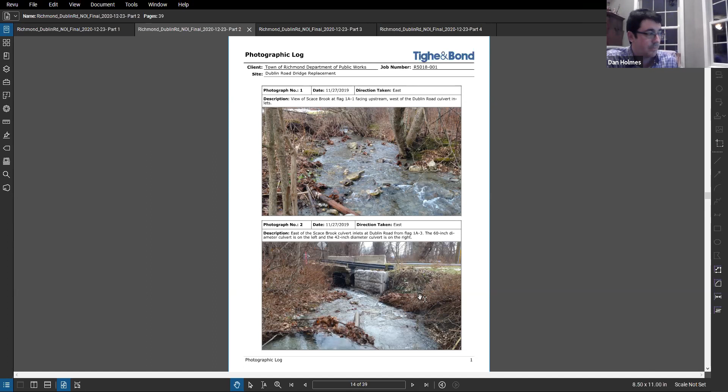So this photo here, if you can see that, that is looking upstream. It's actually located off the road, maybe 100 feet, looking westerly to southwesterly. This is looking at the upstream side or the inlet of the existing culverts. As you can see, there's a little bit of erosion on this side, on the right side, because these are undersized and it's eroded the bank over here.

There's been some temporary barriers to protect some settling that's occurred, and also some temporary concrete blocks as a temporary head wall. There's a little closer look. The flow is going through the northerly pipe, and then under larger rain events, it will overflow into the second pipe. There's a corrugated metal pipe, and the majority of the bottom of that pipe has corroded and is no longer there.

This is what we call boilerplate pipe or steel circular pipe. Here's the original head wall. It looks like a CMU block that's been slowly collapsing and failing, which is the reason this concrete temporary head wall is in place. Down in this lower photo, you can see where the road base and some gravel materials have been washing into the stream.

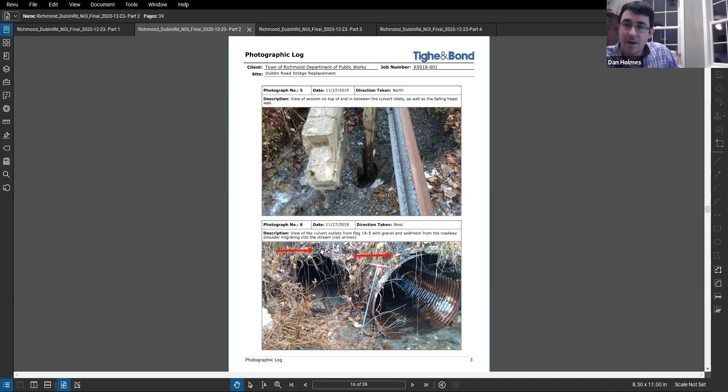These are just more photos of that settlement. You can see right down, that's holding up the guardrail post. Here's the outlet side, the downstream side of the culvert. Again, you can tell the pipe doesn't flow where you can see the active water moving here. More materials that have been washing away into the stream.

Did that catch up? You see this next photo with the arrows? Okay, this is the downstream side. These arrows are pointing to a similar CMU block head wall that has completely failed and is actually in the stream.

This flag right here is the beginning of the wetlands, the BVW. It runs parallel to the road and away from the road. Similarly, this pink flag is bank line. And this photo at the bottom is standing approximately in the same location, just looking downstream.

All right, so this is road surface. There's Dublin Road looking north. This is the inlet side on the left of the photo. This is the downstream side. Actually here, this is on the side, this is downstream, and this is upstream.

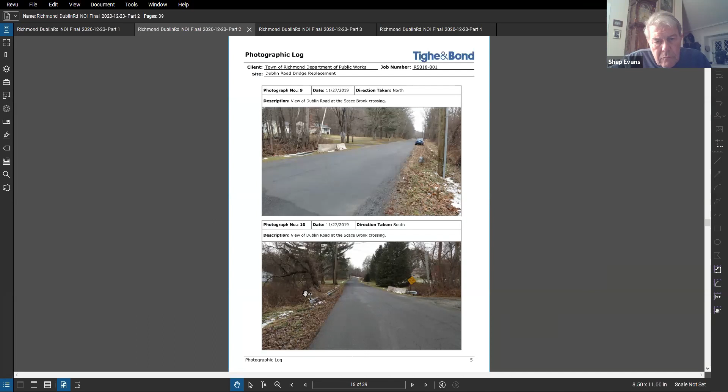All right, that's about the limits of the photo. I'll get to the drawings next, but before I do, this area, roughly here in this bottom photo, is where we're calling for a temporary staging area and a dewatering location. So during construction, as the contractor encounters groundwater only, they will have to dewater to this upstream side and treat the water before it gets put back into the stream.

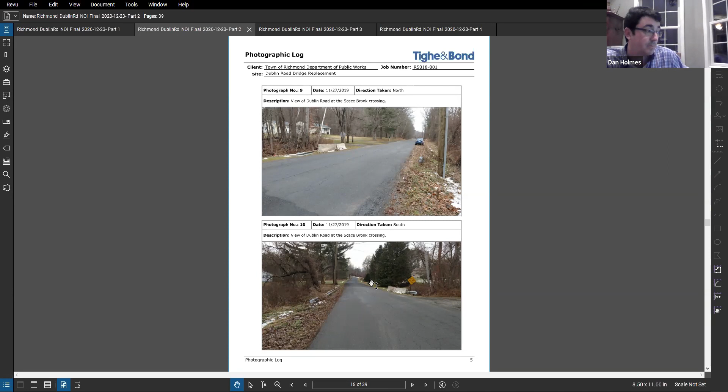We also call for another potential laydown area across the little bridge on the opposite side of the road. I will try to get up to the drawings here.

That's the existing drawing there. So here's the existing drawing, and we're also showing our demolition aspects. I can zoom in a little here.

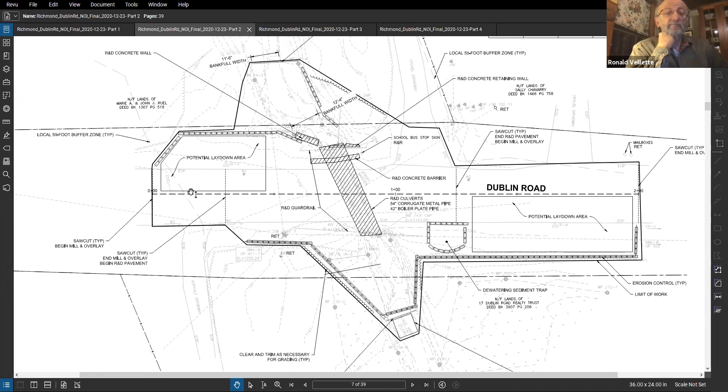So right here is the edge of the road here and here. So the potential laydown areas that I just discussed, we have the dewatering and sediment trap here. The plan is to demolish the existing pipes, culverts, remove the concrete barrier, and also demolish all the concrete head wall. That will be the first stage of construction.

And then this, a little more detailed here with a lot of lines, I apologize, but this is our proposed project and the proposed conditions. So this will be a 16-foot wide aluminum arch culvert with a natural stream bottom. The culvert has been designed to meet the stream crossing standards, which provides greater than 1.2 bank full width.

When the contractor sets up the work, they'll need to install a cofferdam on the upstream side and a cofferdam on the downstream side. If you look into the details, which we can get to later, we don't dictate to the contractor how they have to bypass the stream. They could use flume pipe or gravity pipe and either sandbag or somehow stop the water flow here and let a pipe run by gravity and discharge on the south side where there'll be another cofferdam, or they could set up a pumping system and pump it around.

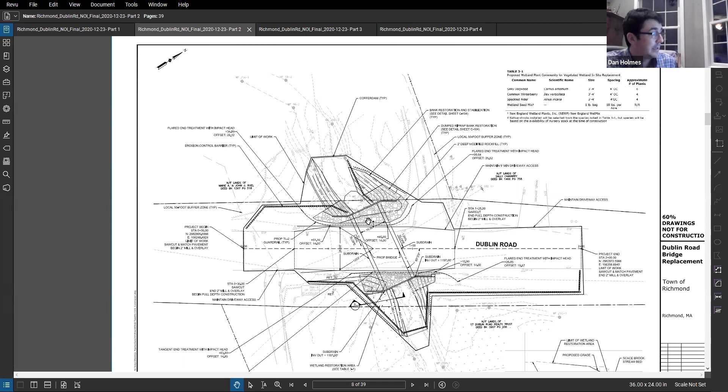There's very little roadway improvement other than a new pavement cross section. Along the upstream side, there isn't any wetlands on this side. It is a bank that we've identified out there. We're just looking to do some regrading of these two banks.

We'll use coir logs and live stakings planted along both sides. Again, we're looking to use a natural stream bottom, so we'll actually save some of the native stream bed material that is removed during excavation and replace it. We will place that on top of a rip rap, which will help protect the structure in the future from any additional scour.

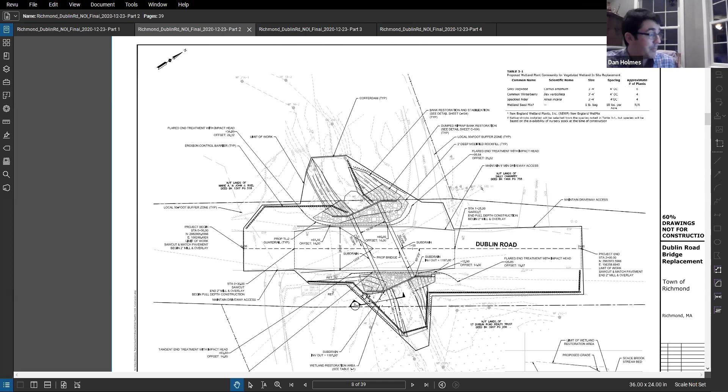On this downstream side, we are impacting some of the wetlands. We are in a wetland restoration area. You can see a little cross section down here, not much of a change from existing conditions. We're calling for 6 silky dogwoods, 4 common winterberry, and 4 speckled alder as the replication, and the rest of the surface will be covered with wetland seed mix.

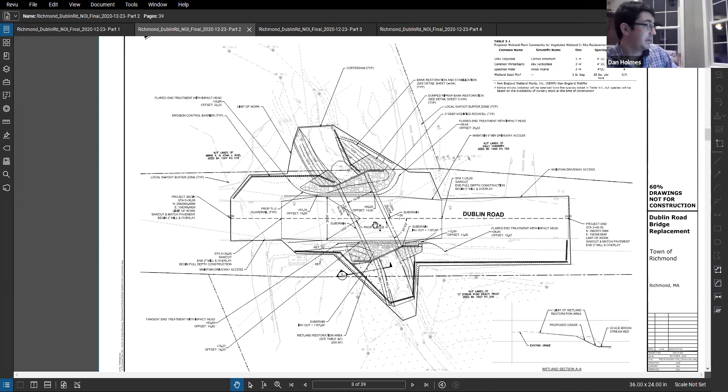That is about it. These are just the details for some of the restoration. We're calling for compost filter tubes for erosion control. There's some of the stream bypass, the dewatering sediment traps shown here.

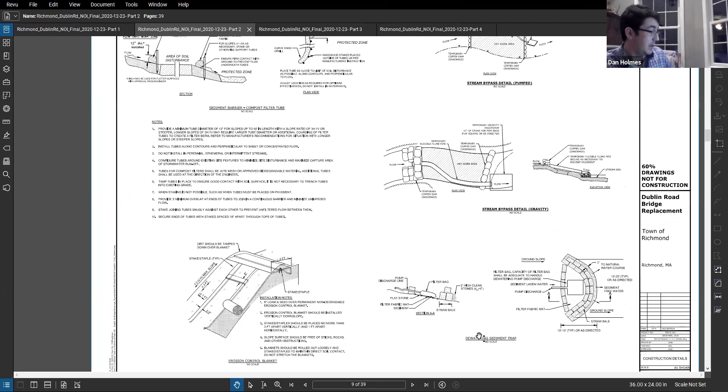There's a roadway cross section, fairly straightforward. Slope restoration, where the restoration is going to be planted loam and seed, but then there's also an area that is going to be dumped riprap right on the upstream and downstream side to protect the structure from any scour.

And I should have mentioned this in the very beginning. During construction, we are planning to set up a roadway detour for the entire length of the project so that the contractors can get in there and get out of there as quickly as possible.

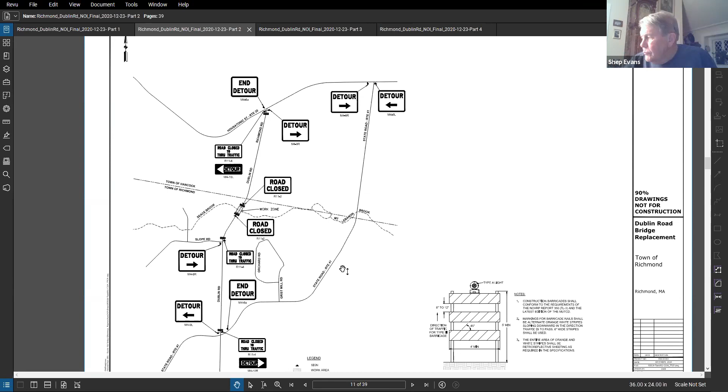What's your time estimate for this project? From road crew, we would like to go out to bid this winter so the contractors can place their bid, allow the town time to select a contractor, and then move towards construction, hopefully beginning the summer before the winter.

Okay, Peter, do you have anything to add? You're part of the application team here.

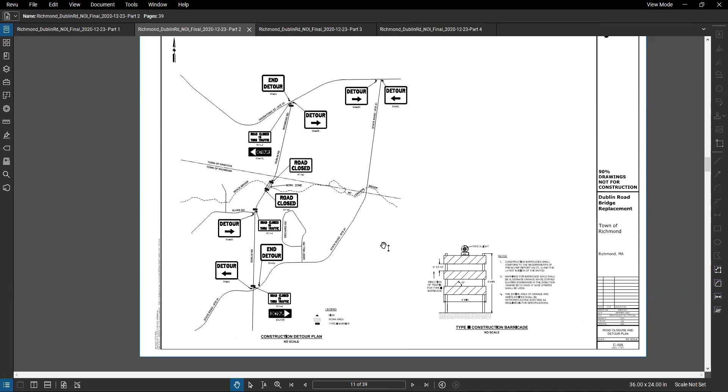Can you hear me? Yes, I can. Nope, I have nothing to add. Dan summed it up pretty well.

Good. For the rest of the commission, if you haven't had a chance to look at the NOI, it is pretty complete. All the hydrological studies and stream studies have lots of detail. Not too many of us are qualified to go through that, but I think Peter probably looked at it a little bit, and it's complete. So if you're interested in looking at that, that's fine, but I have no questions on those studies.

The other thing I have for you, Dan, is the DEP letter that came out with some questions or issues that need to be noted. Do you have that in front of you, Dan and Mary? I do, yep. About going through them one at a time. Okay, they're probably addressed in your NOI. If they are, point to where they were addressed.

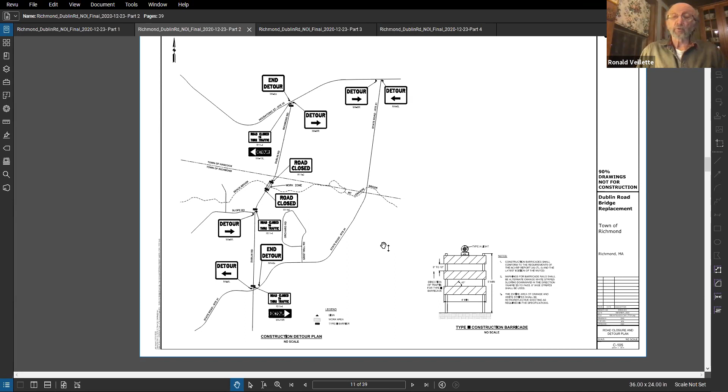So number one, the DEP identified this stream as a cold water fishery, so they want to try and protect that. In our detail, we are planning to put coir logs down by the edge of the banks, with live stakings, with the intent that as those grow, they start providing some shade for the stream to remain a cold water fishery.

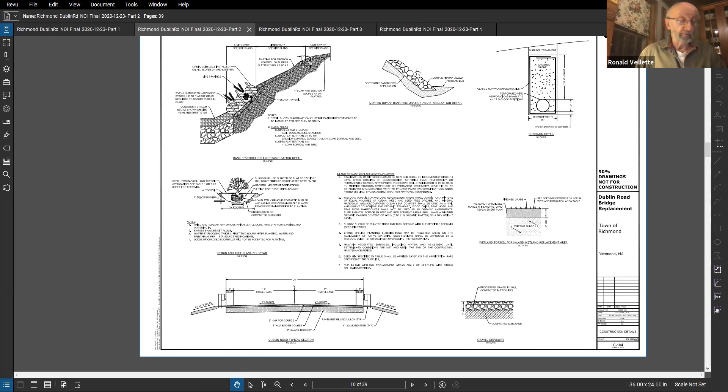Number 2, the crossing's been surveyed under the stream continuity project. I don't have much to respond to that. Sounds like they're all just informational, the information is in the NOI or on the drawings. Right, I think they're making you aware of that.

Guidance on dewatering will be provided in a file number notification email. Again, our dewatering, we do expect, being next to the stream, that the contractor will have to dewater some of it. We have done soil borings out here, and we expect to encounter some ledge and large boulders, so maybe the dewatering is not as difficult if we're on top of ledge, with a little bit less water to deal with.

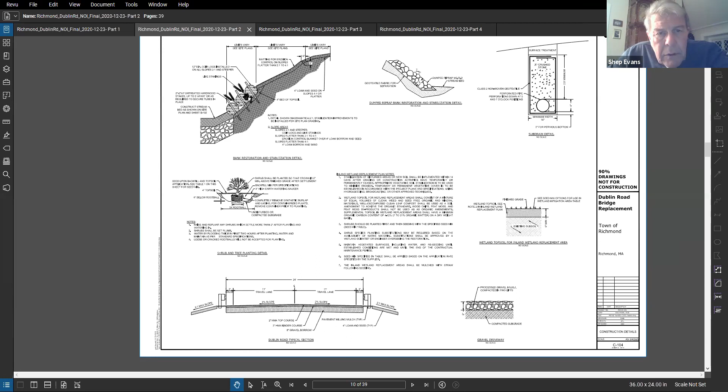Number 4, stream stats calculate a bank full width of 13.9 feet versus the field measured 13.2. What I'd comment on that is stream stats is a very useful tool. We use it all the time, and it gives really good estimations of what will be encountered. I think this actually kind of proves it out through equations and the topography of the site and stuff. You can actually determine on their website approximate bank full width measurements. We're at 13.9, we had an average of 13.2. That again is noted all in the NOI, how we got the average.

So I guess the stream stats was very close to the estimation, very close to actual measurements. We are providing more than 1.2 times bank full and meeting that requirement.

The commission should review the extensive use of riprap that's proposed. We are proposing the inlet and outlet around the head walls and wing walls.

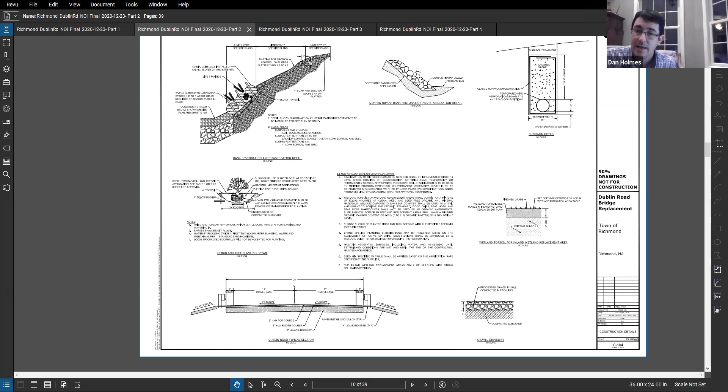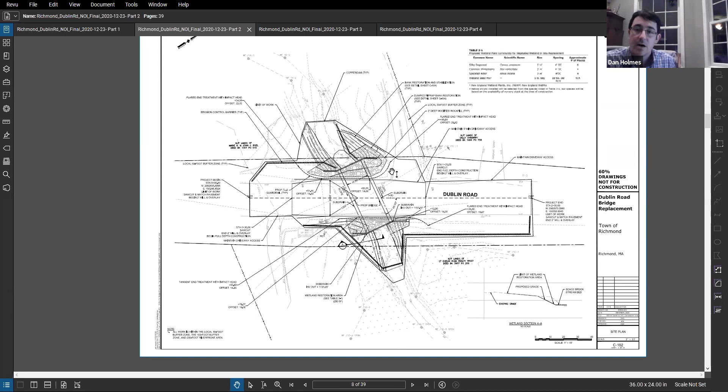And why it maybe looks like we're using an extensive amount is we're also calling for smaller diameter riprap to be placed on top of the head wall, just as protection. Right here is a proposed guardrail, so this project will have new guardrails. Underneath the rails, we typically put asphalt milling to minimize growth of grass or weeds. So on the drawings, we try to do that offset of the milling, and then we're just going to put a little bit of smaller diameter rip, 4 to 8 inches.

And then on the stream side, we have a line right up there and here where we are proposing some larger diameter riprap, upwards of 18-inch stone, to protect just this head wall and wing wall area.

And then actually on the downstream side, we're doing the wetland replication area, so there's no riprap proposed there. There is, similar to the other side, some smaller diameter riprap just behind the guardrail to the head wall. So for a maintenance purpose, it kind of makes sense—we didn't want to put grass, loam, and seed right here that would have to be maintained over time. And then we do have a small piece of slope protection riprap on this side, which is not within the wetlands.

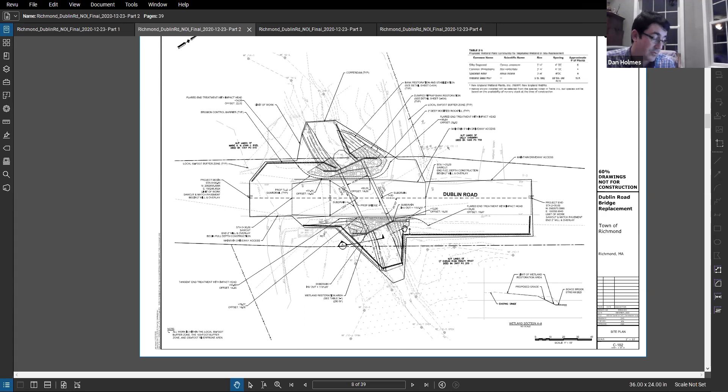And then I guess number 6: in order to provide appropriate water depth and velocity at a variety of flows, especially low flows, it's necessary to reconstruct the stream bed within the structure, which we're proposing to do. It's important that the continuous thalweg, the deepest portion of the channel, be maintained through the structure. When constructing the stream bed, special attention should be paid to the sizing and arrangement of materials within the structure. To prevent failure, all constructed banks should have a height to width ratio no greater than 1 to 1.5. It should be tied into the up and downstream banks and configured to be stable during a 100-year event. The bank should be designed and constructed so as not to hinder riverine wildlife use of the stream bed and banks for passage. All right, sorry, that was a lot.

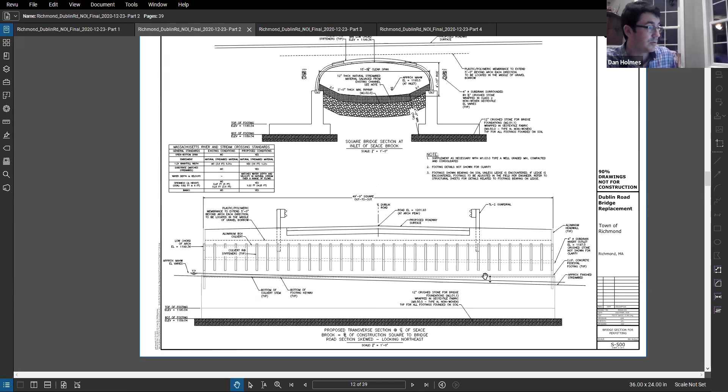I guess what I'd say there is, on our proposed design—I'll give this a second. Did this new drawing come up? This is like a cross section of the structure. You can see we have a 2-to-1 slope, so they were pointing out 1 to 1.5 slope should be the max. We actually call it 2-to-1, they call it 1 to 1.5—we just reference it differently. We are proposing a flatter slope than what they're saying the maximum slope should be.

Yeah, I noticed that. So those are the steeper slopes, which are intended to tie into the banks once you come outside the culvert. And then we have a parabolic bottom to the stream bed. There will be that low spot, going back to the thalweg—you'll have that low spot as the stream starts running through here. It will create a deeper thalweg that meets the upstream and downstream side. And with the 1.2 bank full, there'll be some upland area under normal flow conditions that will allow wildlife to pass through there, in addition to fish.

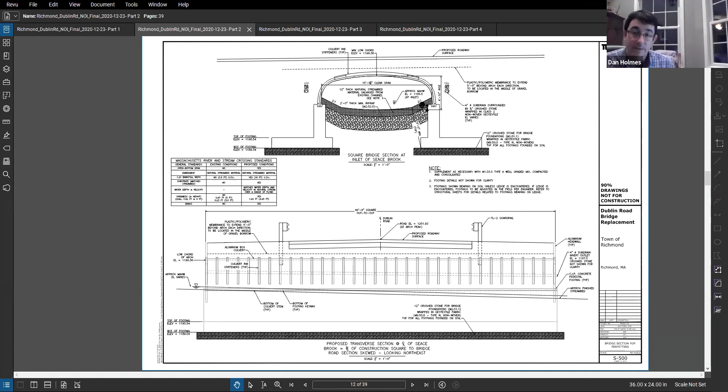How about a short dissertation on the replantings relative to the shrubbery? You're taking out a lot of—you're going to be taking out all the invasives in the work area, I understand, as part of your NOI. Yep, that is true. You're going to be replanting some native species in the areas to replace what was there.

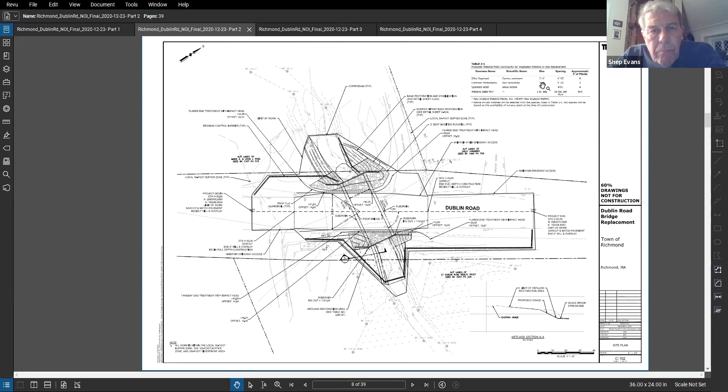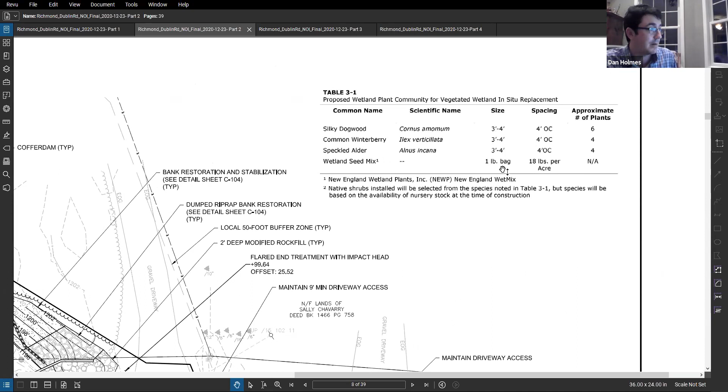So our replacement plan—is that visible? Yes, yes. All right, so we're calling for 14 different plants. They'll be spaced 4 feet apart. Their size will be 3 to 4 feet tall when they're installed. Now that is specific to this restoration area.

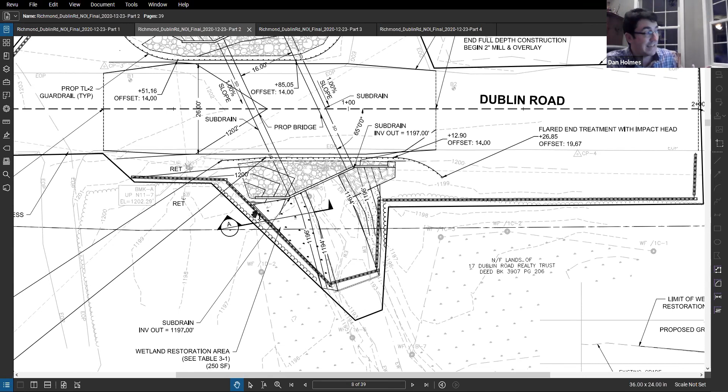And going back to some of those invasives, this area has a lot of those invasives. So anywhere within this project limit that we're clearing or identifying will be cleared out and removed. Unfortunately, there's significantly more down in this area, but that's outside the scope of this project.

That's too bad. And then along the stream edges, both upstream and downstream, we are proposing coir logs and live stakings. So you will get some plant growth, and the roots will help grow into the banks and help stabilize them as well. That will be both upstream and downstream.

As far as other surface repairs over here, it's kind of hard to see, but there are contours here showing where this washout is. That is all going to be fixed and repaired. And then this is all kind of a grassed area, so that will be restored with loam and seed.

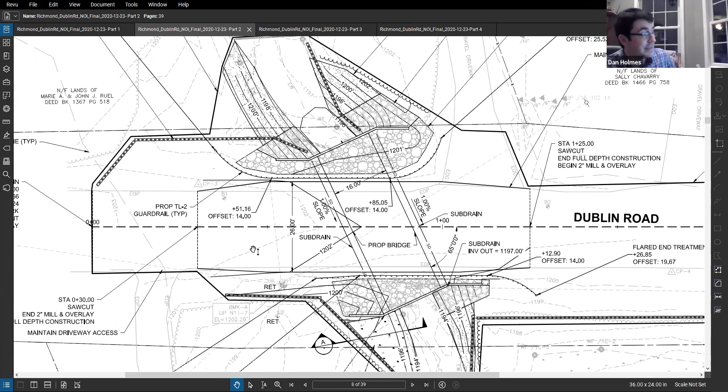You point out the erosion controls. So upstream have erosion controls outlined here and down here by the waterway. On the demo plan, we showed this area as a potential laydown site, so we wanted to make sure that was outlined with erosion controls too. On the downstream side, we have erosion controls, basically following your grading limits, that proposed line. So we're going to run a parallel erosion control along that line, catching and running off here, outlining the work area.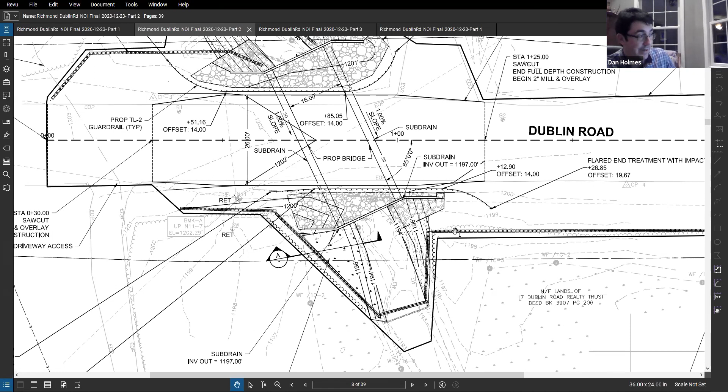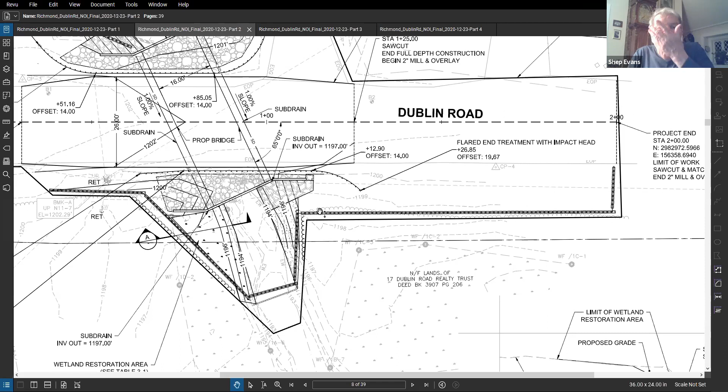Sorry, trying to zoom here. That bubbled line there, that's the existing tree line. So on the north side of the project, we're planning to connect it to the edge of the road, run it down to the tree line, along that tree line, and then back to tie in where that project limit is, where the grading limits are.

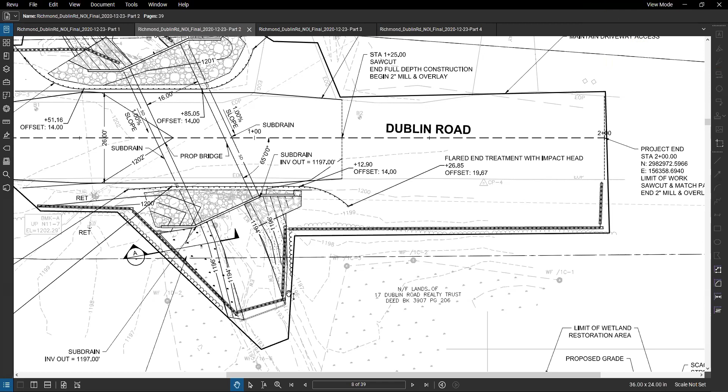Okay. Peter, you have any comments on this? Are you happy with the erosion controls and all that good stuff? I assume you are, because you were part of the process here for them designing this. I'm fine with it. I didn't hear you. Yeah, I'm fine with it. Okay, good, thank you.

Shep, I'm gonna ask - any comments from Natural Heritage? This natural heritage is supposedly not applicable to this one. Is that correct, Dan? I would actually want to loop Mary into this a little bit, if you recall. Yep.

We just received approval from Mass Historical Commission. They want to save the old culvert? Luckily, no. It's the 19th Century Industrial Museum that wants them. And then we could save them and have the contractor deliver it if they do. But I mean, is this estimated habitat, any of it? I don't believe so, no. I don't think. No, okay, it was stated that way in the NOI, so I didn't even ask that question. It wasn't applicable.

So I would want to point out to the commission, this is a perennial stream. It's under the riverfront protection. It's being treated as a limited project because of the nature of the project, and they've minimized the impacts to the area.

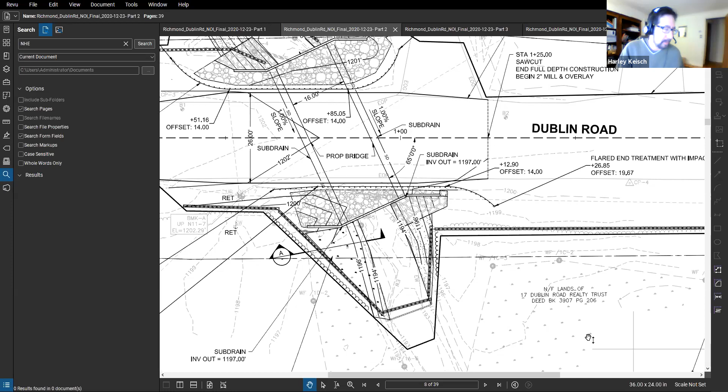Well, one of the questions I had related to this drawing was the laydown area on the right side of this drawing - actually it's on the other drawing - but does it encroach on that wetlands area there on the side of the road, or is it my imagination? On this north side of the project area? Yeah, so I guess that's the north, definitely. Okay, so here's the wetland line, wetland flag 1C1. It's a little grayed out, but it starts there, and it comes across towards the stream and then goes down towards the stream bank. Where's the edge of the road?

The edge of the road, existing - the road is right there. Because I was out there today and it looked like it was pretty swampy there. I don't know. Who delineated that? One of our employees at Tighe & Bond, who's a wetland scientist, went out here and delineated all of this. Okay.

So that was my one question there. I had another question about the - I'm pretty new to this, Dan, so please forgive me. No problem, I'm just learning. So I was looking at these openness and height specifications that were given, and there was a 6-foot height goal, and all three of the alternatives, including the one that you've chosen, they all ended up with a 4-foot height. And I was wondering why that was - is that just limitations of the way the topography is, or?

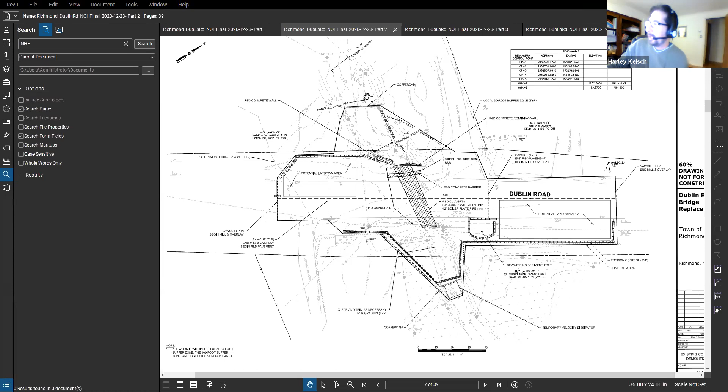Hey Harley, it's Pete. I believe in our previous conversations it was a topography thing - they didn't want to raise the road 2 feet and have a hump. So believe they could only manage to get about 4 feet, where the ground was, in order to get the coverage they needed over top of the culvert for structural strength.

Okay, that makes sense to me. I just wanted to understand it. Is there ledge underneath here?

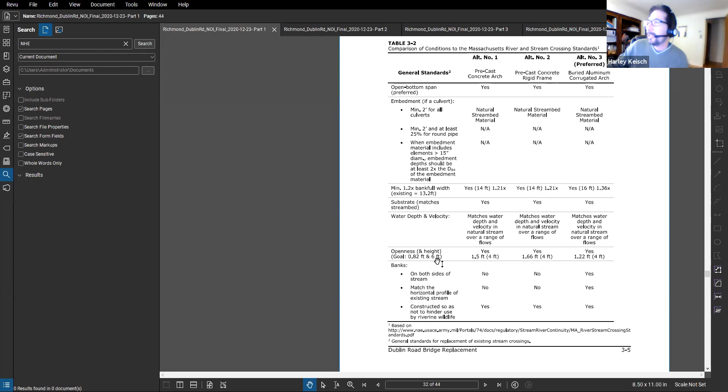There was another thing on page 13 of the NOI that I was curious about. Let me see if I can find it... It talks about being exempt - it's checked no as being exempt from the Mass DEP stormwater, but it doesn't check off any of the reasons why that are listed under there. I'm just wondering what that was about.

Are you guys able to hear me? Now we can, yes. Okay, I was talking before, but I realized nobody could hear me.

Yeah, so there is case law. I read that case that was cited, the BCC case, the Berkshire Community College case. I saw that later on down in the NOI and read through it, and it seemed like the fact pattern was very different than what we have here. It talks about point source discharges, and in the BCC case there were a couple of point source discharges that were well off the site of the project. In this case, it seemed like the only point source discharge, if you could call it that, would be the dewatering pump and the silt bag system they're describing. So I was just wondering how that particular case really applied to provide an exemption here, since the fact pattern was so different.

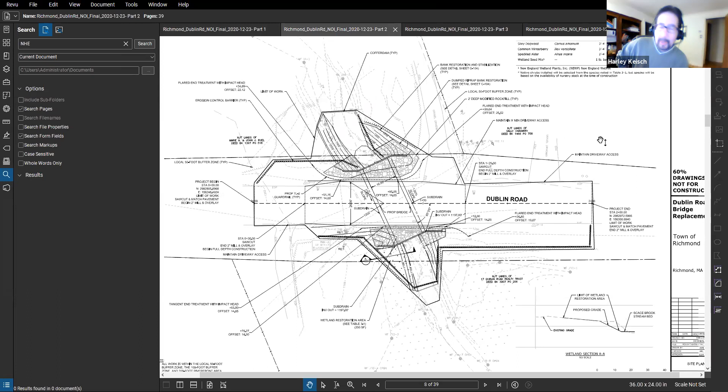But I did want to talk a little bit about the NEWP grass seed products that were being referenced. There were some discrepancies in the NOI between the products. For example, down at the bottom in the table, the text says they're going to use the NEWP erosion control moist mix seed, but then the table listed a different product. So I was wondering which one it was, to make sure we know which product is actually being specified.

And then the other bit was down at the end, talking about post-construction monitoring. It specifies monitoring for 2 full growing seasons, which is the minimum provided for under the regulations. I was wondering whether we might consider - and I'm addressing this to the commission as well - extending the post-construction monitoring of those plantings to maybe 3 years, then skip a year and come back at the 5-year point, just to make sure everything took the way we wanted it to, and that the invasives didn't come raging back in. I wondered whether any of the other commission members had an opinion about that.

This is Ron. The only opinion I had was the fact that Peter will be maintaining this road after it's done, and he can monitor that. If there's any issues with the plantings, shrubs, trees, grass, or whatever, that's one thing. I'll ask Peter if that's something he'll probably be watching himself as he goes along, to make sure the plantings stabilize. In terms of the time, 2 years is standard, and after that, if there's issues, Peter will be watching - that's his road.

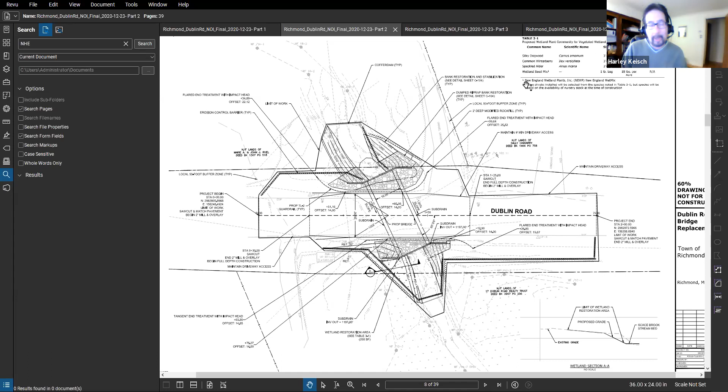So I guess my question to the commission would be, do we feel like we should put a longer condition on that? My opinion, having heard this discussion, is that maybe we ought to give it more of a chance to succeed.

Anybody else have anything to say on that in the commission? Well, I would suggest maybe, what is, Dan or Mary, what is the square footage of the area that we're planting? It's about 250 square feet.

So I would propose that we add some more to the quantity so that we give less opportunity for the bittersweet and invasives to come in and have more of a mass, because I can't really see it, but what did you say, Dan? You said 14 plants, right? Correct, six silky dogwoods, 4 common winterberry, and 4 speckled alder. The spacing is about 4 feet on center for all those.

Just to point out again where this little area is that we're talking about, it's this southeast corner right there. And right here, that is the existing tree line, we're calling it, but that's basically the edge of the invasives. If you've been out there, there's a fairly large tree that's been completely overwhelmed by the invasives. That's going to be removed.

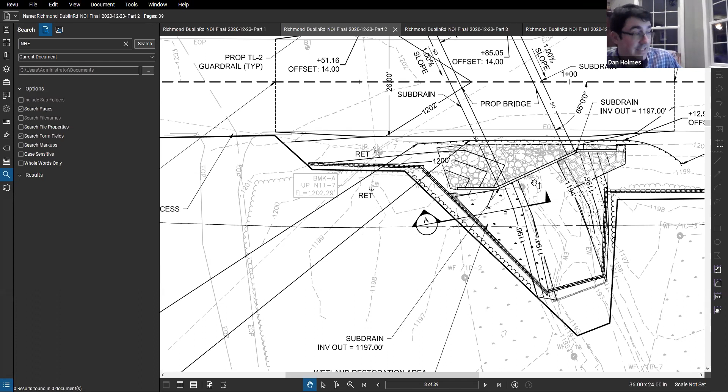But we're really only clearing this small little area. And if you go out to the site and look down this stream, this entire area... Is that large tree, I think it's a willow, in good shape? Or not? I know it's got invasives on it, but if you clear the invasives, would the tree add to the protection and the value of the area?

I guess my most recent recollection is during the winter time, so it's kind of hard to see exactly if it's thriving or not. I guess the comment I would say is it is completely covered with invasives that could be removed. But the other thing is it's almost like leaning to the south side here, right? It's adjacent to an overhead utility line, which is right here.

And then the tree's somewhere right around here. So it's been trimmed in the past, probably from the utility company. So this whole side by the road has limited branches, and going this way, there's a lot of branches. I'm not an arborist, but the likelihood of that eventually coming down in a storm, being that heavy on one side versus the other, wouldn't be surprising if it happened.

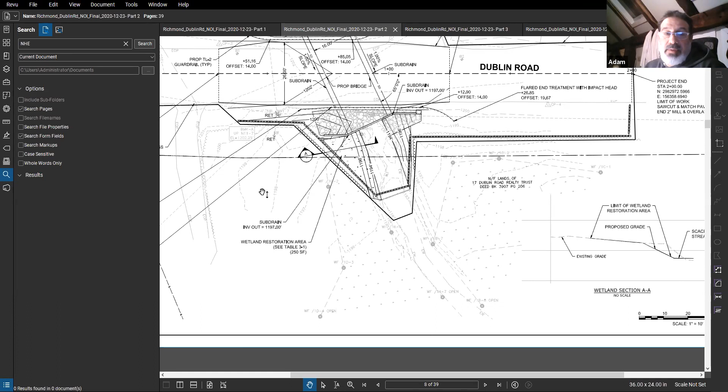I'm not going to be going any farther than I am now on stuff. Yeah, I think there's got to be a reasonableness to what we expect of Pete. He's not a plant specialist. I'm not going in looking at what's invasive and what's natural and what should be there. If it's growing up, I'm going to cut it.

Well, we're talking about - you're talking about the willow, I'm talking about the planted shrubs that we're putting in, whether they survive or not after 2 years, 5 years, or whatever. Doesn't sound like the 2-year inspection would be in the contract for the plant stuff. What Dan's saying there - we could come up and help Pete walk the site, identify concerns and things like that at the 2-year, 3-year mark. But as far as the maintenance, if these trees maybe aren't flourishing and they want to replant them, again, that would go to the town.

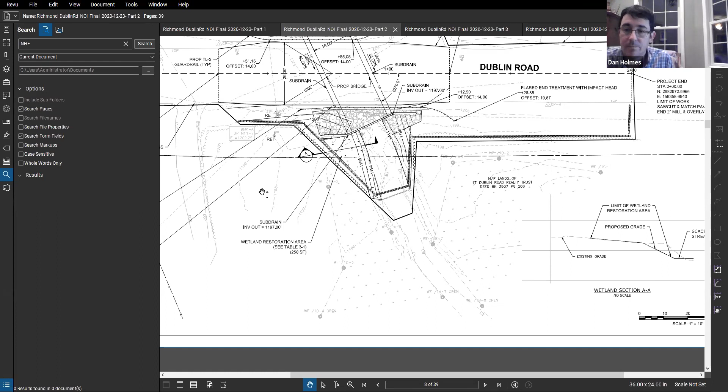Yeah, that's the one. So I guess we could put a special condition in there in terms of the 2 and 5 year inspections. And then it sounds like the town would have to be responsible for repairing it if there's an issue.

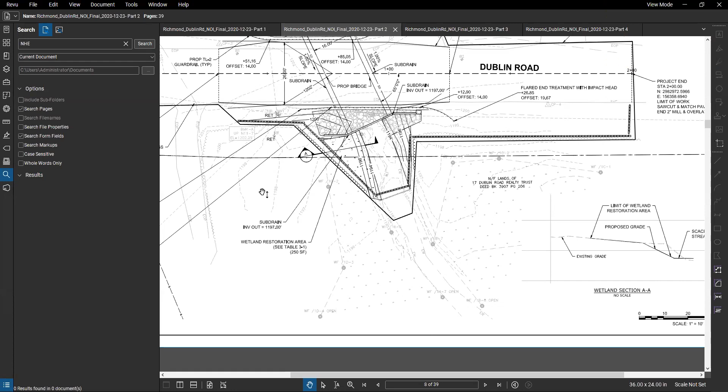The town can only be responsible for what's in the right of way, though. The town can only maintain and be responsible for what's within the right of way. If stuff goes over the right of way, then we need permission every time we go. Yeah, I guess that's true. Peter, how would we handle that? I know we have a problem already on the east side, so. How much of this project is outside of the right of way?

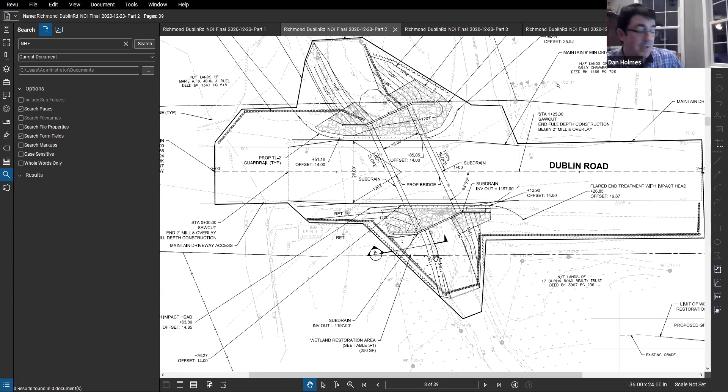Not too much. I don't have the square footage off the top of my head, but this line is the approximate right of way. So there's just a little bit of clearing up and over there. It's a small portion, but to Pete's point, probably at least half of the wetland replication area is outside the right of way.

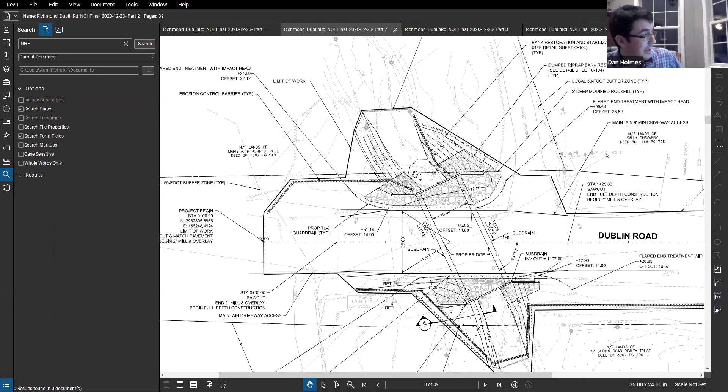What about on the upstream side? Upstream, it's a fairly wide right of way, about roughly 60 feet. Here's the line, the dark line there, and then here's the limit outside. Square footage wise, rough guess, 500 square feet, excluding the stream.

Okay, right, that's upstream. Well, I guess what we could do, if everybody votes okay on it, is just specify the inspections at the 2-year, 5-year mark. We don't have to specify the responsibilities within the order of conditions; it would be laid back on the town, so whoever does it can be determined at the time. That sound right?

No comment? So I'm not sure what you're saying, Ron. Can you say that again?

We're talking about having the inspections, the facility inspections at the 2-year or maybe 5-year point. If there are issues, who does it? That can be TBD, but the town would be responsible once the contractor leaves, correct?

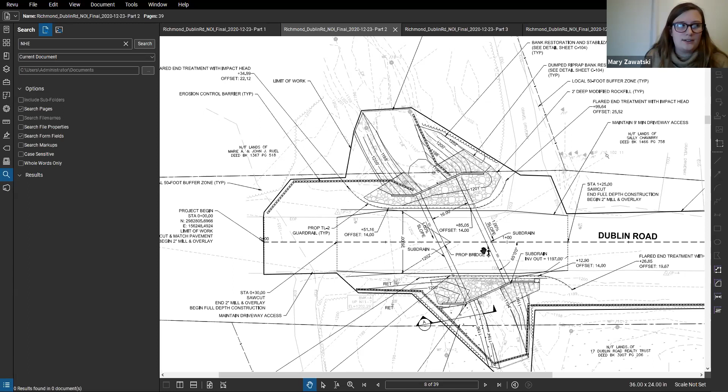After a year. Ron, I would much rather have a request for certificate of compliance on completion, plus a report at 3 and 5 years rather than 2 and 5. The certificate of compliance would not depend on completion of the 5-year monitoring? No, not necessarily. A certificate of compliance can certify the completion of everything but the follow-on. Okay, and the follow-on can be whatever it's recited to be.

Who's doing it? We've done that before. Whoever's responsible. Who's responsible, the applicant? This is the town. The town. Because Higginbotham and the contractors will be off the hook after the contract's over. Well, unless their contract requires them to follow on. That's right.

But we don't have to specify the contract, we just specify the requirement for the inspection and corrective measures. That sound right? We don't have to specify the contract, we don't have to be tied down by it. We just put the requirement on the applicant for the 2, 3, or 5 years, whatever we decide, to do the inspections and whatever corrective measures are necessary.

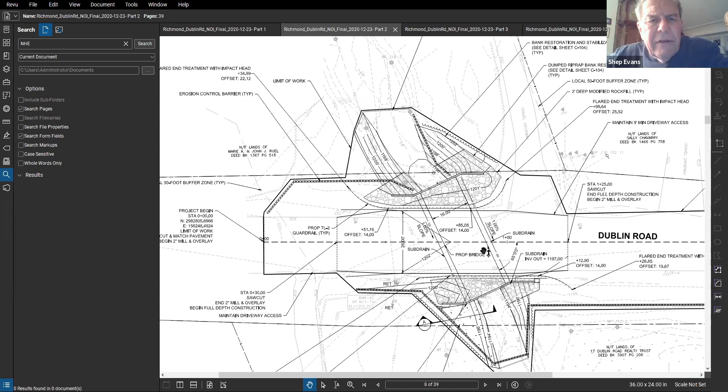The applicant is the town. The Conservation Commission can require a report at the end of the growing season, at 3 years, whatever that is - November 30th or whatever, on or before - and at 5 years on or before, that's what they got to meet. And they already have in their NOI to prepare a report at the end of the second year.

So they just modify that condition to 3 years or whatever, 3 years, 5 years. They do have a report in the NOI. Is that good? Dan, either one. Sorry, I missed the last part. You already specified that you'll be generating a report at the end of 2 years on the plantings in your NOI, correct? Correct, I'm pretty sure I read it in there.

And that's 2 growing seasons, ending November 30th. Yeah, it would be after the growing season, the second growing season. Yeah, or whatever is an agreeable number. Doesn't matter, much more important is that the report be from somebody knowledgeable enough to know what they're reporting on - is the tree growing or not, or the shrub growing or not?

Adam, do you have any comments on that? Is that the right way to go about it? I can report on it if you like, in 3 years. Yeah, you're qualified to do that. But we don't have to say who right now, we just say when, and then the fact that we need a report at the end of the inspection.

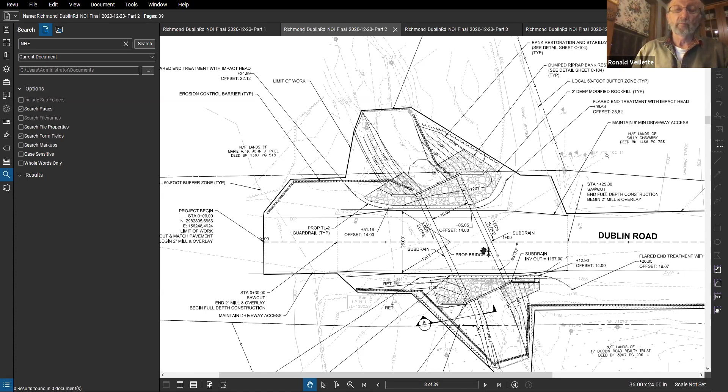Makes sense. And if it didn't take it, the 5 year, we'll have to readdress it somehow. Well, that's another matter.

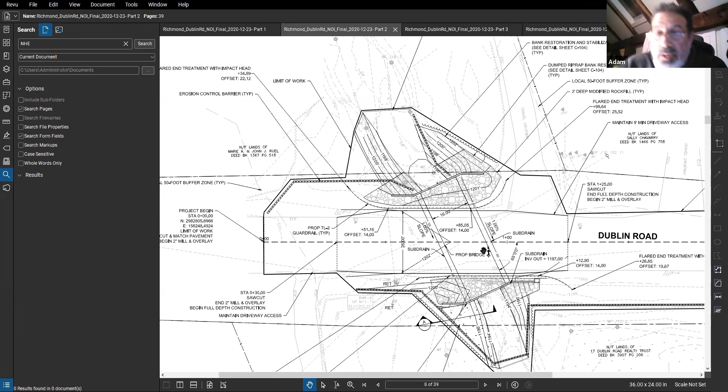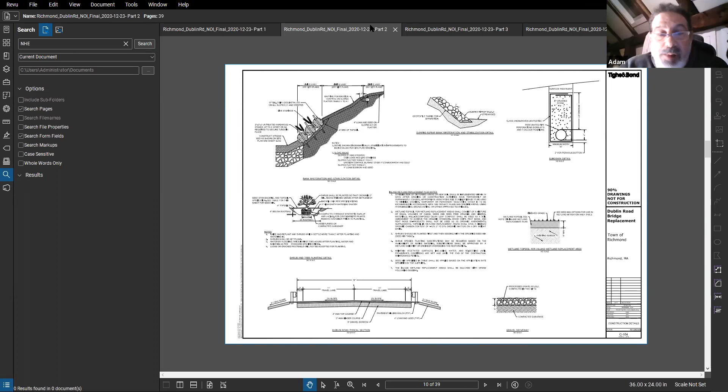Hey Dan, would you mind showing me the picture with the coir logs on the graphic, on the uphill side, the bank? It's actually the bank restoration throughout the project limits, so wherever we're grading the bank back into the stream, we propose this, to do this replication.

Is that live staking? And then are the coir logs, are they wattles, or is there seed in those? There's not seed in them. Generally I believe coconut fiber. That just slowly breaks down?

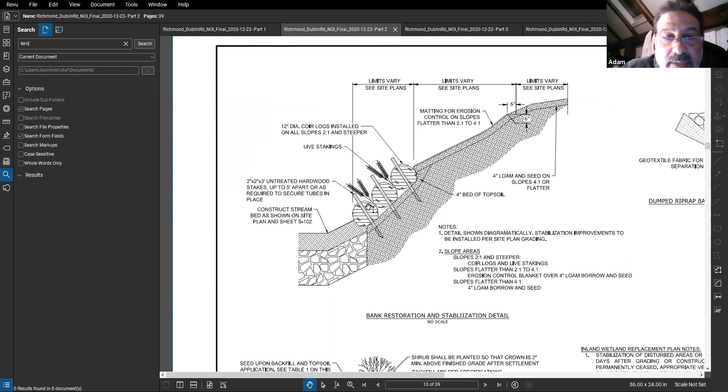And then what is the live staking of? I don't know if Mary has a specific type of plant, but a wetland style plant that would be successful right next to the waterway. Yeah, I don't think we specified.

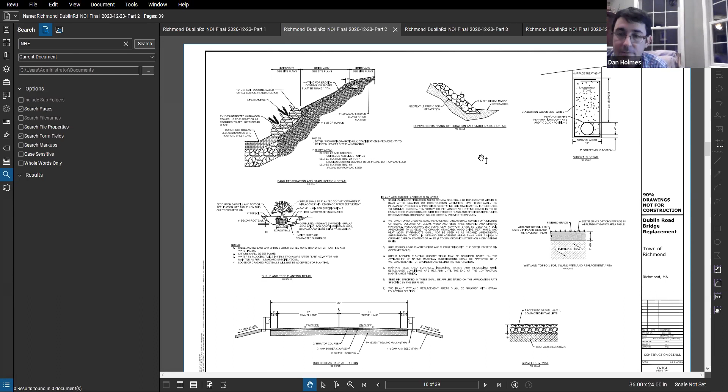Is there a native willow? Red osier dogwood, yeah. I was wondering about a willow. Is black willow native? Does anybody know? Yeah, I've got a list somewhere, I have to dig it out, but I don't know off the top of my head, these types of questions, but we have folks that could recommend a specific type of planting. Okay, anything else on the plantings?

Dan, I had one question. This is relative to the drainage basin for this river. You came up with 0.59 square miles. How did you come up with that? Where did you get it from? Is it right off some map somewhere, or did you have to compute it based on this particular river?

So a combination of places. We use the USGS topo maps that show the contours, and based on those contours, if you draw perpendicular lines, you can identify what that drainage basin area is. But actually, going back to that StreamStats software that's right online, you zoom into this culvert, this drainage area, pick that location, and it uses a similar method, using the contours that MassGIS published to generate that basin.

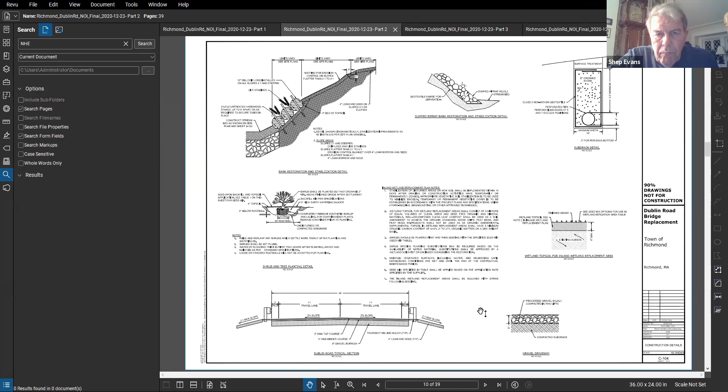I was wondering if there was some map somewhere that showed the watershed drainage area. Actually, another way to do it is computational, to use StreamStats. Yes, you're using the software to give you numbers. Now, I thought there might be a map somewhere. There is, the topographic maps, that's the other way we use to define it. Yeah, you had a beautiful picture of the drainage basin in your NOI.

I'm trying to find it right now, one sec. You didn't draw that map off some other map somewhere, did you? That's what I'm wondering, this is my own information because we're looking at watersheds around the valley here. If you can't answer off the top of your head, I don't want to hold you up. It's figure 2 in the H&H report.

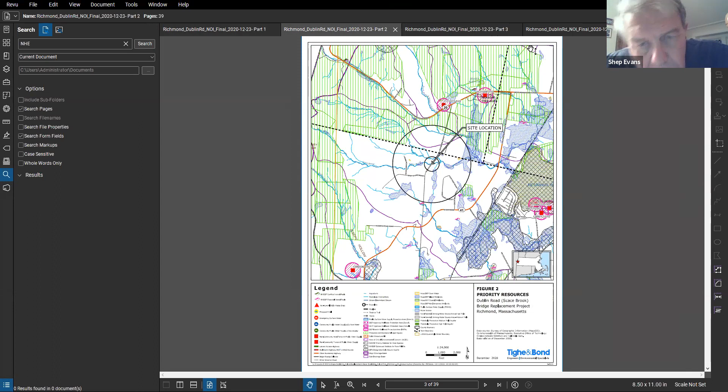This isn't, I don't know if this is the USGS map, but here's a topo map that you could follow these contours and identify the drainage basin. No, I understand that. I wonder if there was a map somewhere that already showed it, or if you had to end up drawing it by looking at the topo information. So you answered my question. Oh, there it is, here's one.

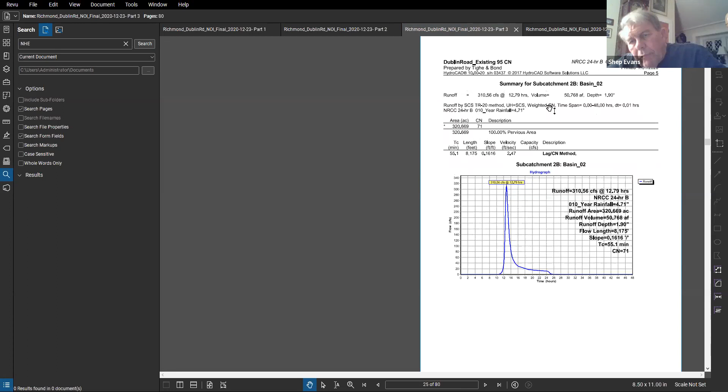Oh, those are the cells, that's not the drainage basin. Okay, so these are the drainage area maps. There's one in there. I felt like there was the StreamStats map in here, but let me see if I can find it. I definitely saw the StreamStats in there. Yep, the number is mentioned on page 2-1, that's about the 20th, and there's a picture in there somewhere.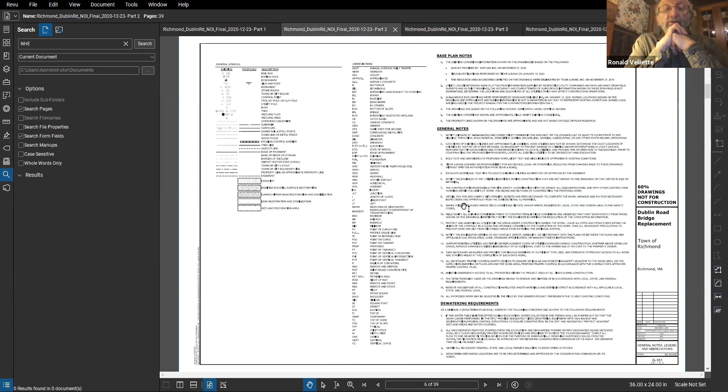That's okay, the document was so long we had to break it up into 4 different files. I know, sorry. All right, yeah, the eDEP website wouldn't take it.

Right there, nice, is it right? You just do that based on the topographic information off the regular GIS map, looking at that information, drawing it yourself, but that drawing didn't get pulled out of some other database somewhere. Nope, this is actually auto-generated from that StreamStats website. Gotcha, okay, it's a very useful tool. I guess I'm not familiar with it, but sounds like it's useful.

Okay, Ron, just wanted to circle back one more second on this plan for the monitoring. So in the NOI document, it starts on page 181 or 2, and it talks a lot, it's 184, it talks about monitoring, and I just want to make sure what exact changes we're making here, if any, to what's in this schedule, what's supposed to be in the reports, how the reports are supposed to be submitted. So is that going to be a change to 5.3, which is on page 185?

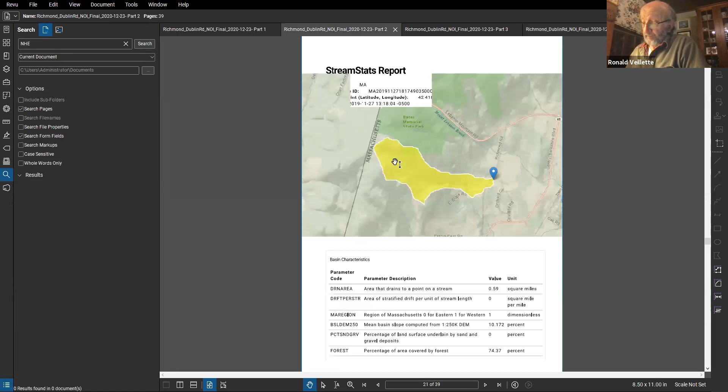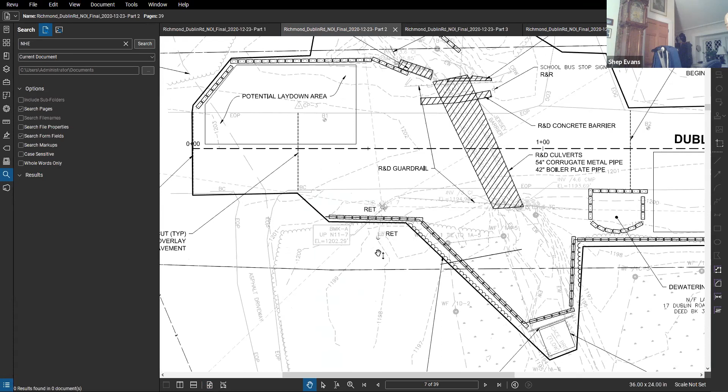But in terms of the north-south, within the right-of-way, you're only going to be doing it inside the work limit line, is my question. You're going to continue along the right-of-way if you're not inside of it. I think the plan is just within the limits of work within the right of way right now. Yeah, because I'm talking about here, and it's continuing down the street.

Is this the area you're talking about, Ron, in between the right-of-way and over here? Yeah, my concern is if there's invasive out here and it's in your right-of-way, you don't want that cleared, or controlled I should say, you really can't clear it. That was my question for Peter. I guess it's up to Pete, but we could add a clearing limit line and change this erosion control down right along the right-of-way.

Now, when you clear, are you just going to basically cut them down, dig them up, and get rid of that, or can you actually try to kill them? Yeah, I think we call it clearing and grubbing. So you cut everything down and then you grub out any of the roots, there's probably not too much, but kind of clean that out. My guess is they'd use an excavator with the teeth and just scrape it all up right out.

Yeah, because that would give the replantings a better chance if you got rid of that stuff outside there, I would think. Okay, I think that restoration would likely just be loam and seed. It's kind of adjacent to this abutter here who has grass in this area. Well, if the Conservation Commission had its way, since it's a river, we'd love to see the whole 200-foot there forested. But this is our open land, so.

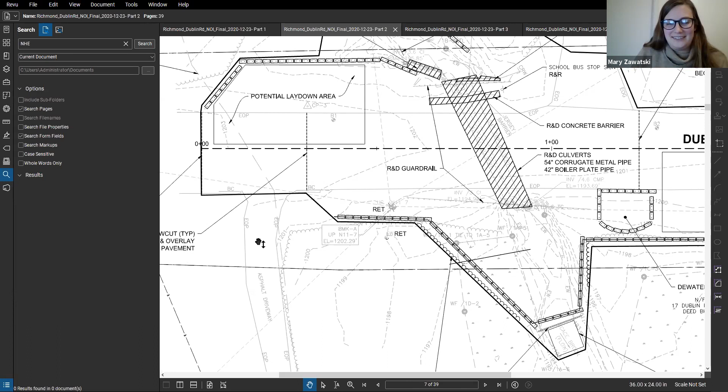Yeah, I mean, you can chase them all over the place. Yeah, I know. Okay, we talked about limited project.

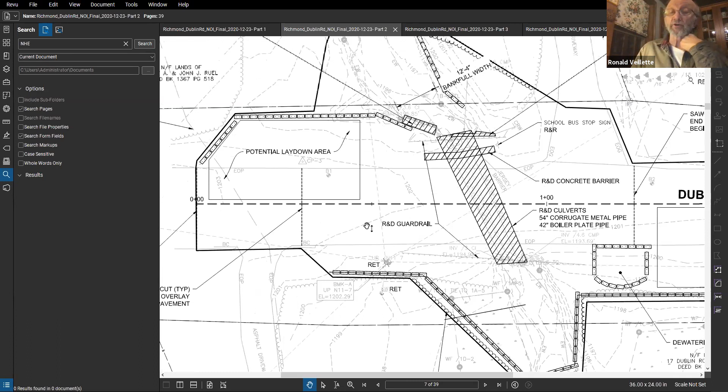Oh, the Eversource planting. We were told by you guys, when we gave you the certificate of compliance for the Eversource project, that there were some plantings required on their NOI that you would take responsibility for, along that side of the road, behind the bank on the southern side. Yep, so I was just going over this today. So what we were thinking would be a good plan would be 12 additional plantings of the same type that are going in the wetland replication area, but along the bank, where wetland 1A3 is in that area.

Okay, so the same species as you have proposed for the other areas? Exactly. Mary, is this the area right here? Yeah, on the left side. I forget which direction that is. West, southwest.

Yeah, right in here somewhere. You might remember the exact area, because I know it was over here. I think it was from this, this was the utility pole here. Yeah, that was a utility pole that failed and put oil onto the road and had to be dealt with. Right.

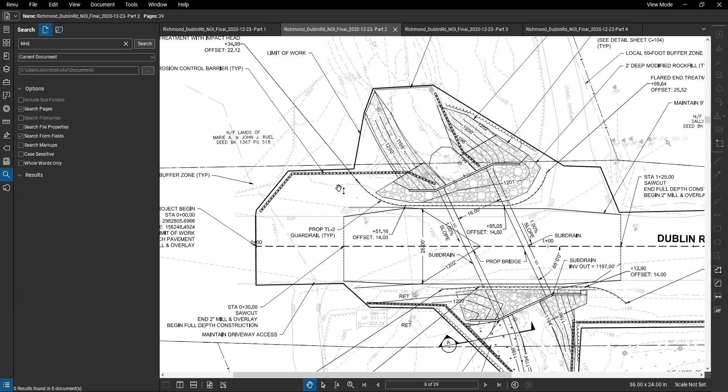So the agreement was to put them in as part of this project rather than the previous project. And Eversource is the one who was really responsible, not the town, on that Eversource project. That was their right of way. Shep, you might want to speak up on this because I think you're the one that raised the issue.

You hear me, Shep? Are you on? Yes, I can hear you. I'm ruminating. Okay. What? So what's the deal? So this is all laid off on the town, and the town has to bite the bullet and plant the plants, or what?

I thought that was the agreement. Because we let Eversource off the hook, because it wouldn't make any sense to have that done as part of their project, because it would have been dug up right away for this project. Yeah, but the town was never notified. So I was never notified about extending my project because Eversource didn't want to. Yeah, Pete, I understand that, Pete.

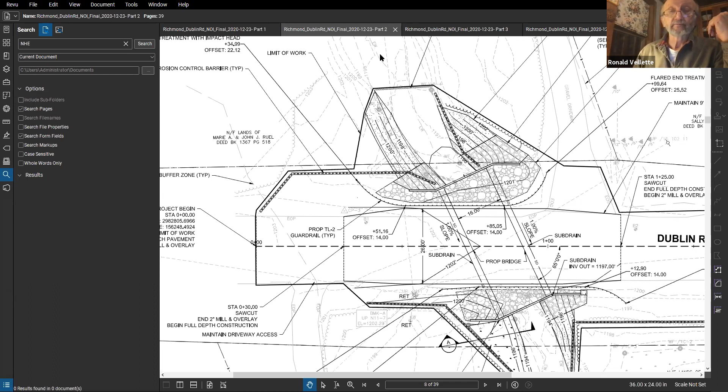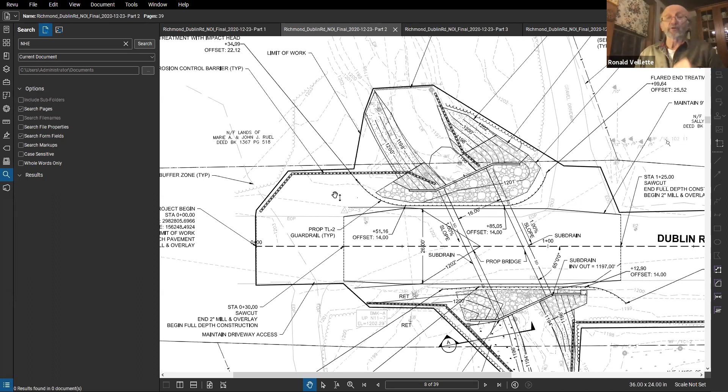I guess if I could add quickly, we talked about this a little bit. On this restoration side, we are planning to add plantings to those live stakings along this entire, actually on all four edges, but you were basically talking about this portion of the project area. There will be some plantings along that stream restoration.

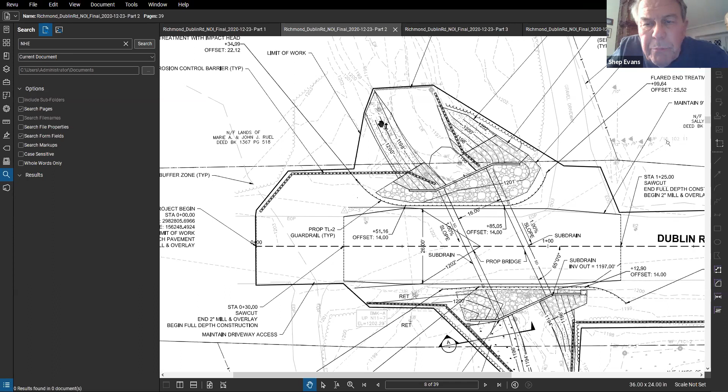Well, I don't know if that qualifies for what was originally agreed to. I don't know that background, but I just wanted to point it out. We certainly don't know on the commission side, but it's entirely appropriate to approve the project conditional on some sort of planting plan to be proposed mutually, subject to commission approval subsequently.

Okay, I'm back for my little drafting exercise. I put in the chat box the language for the first, third, and fifth calendar years. I don't know if you guys can see that.

Is that your cat purring? Yeah, it is. She's in heat. Oh my goodness.

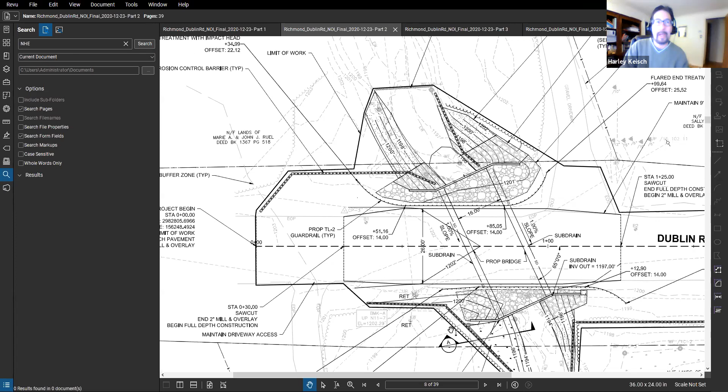This is just a modification of the language that was in 5.3. Like the rest of the plan they put together, it looks good to me, it's just the monitoring of it. So this condition would just change the timeline of when these reports would get given to the commission to look at.

Yeah, one comment. In section 5.1, data will be collected 2 times during the first post-construction growing season. I think that was the reason why the first growing season was left out of 5.3. Just mentioning that, but I don't think it says that a report will be submitted, so that's where it might be worth including that as well.

Should we call this a plan or restoration plan? A revegetation plan rather than just planting implies the whole project.

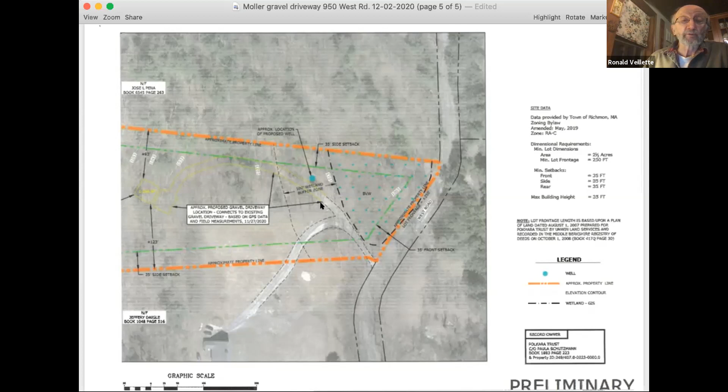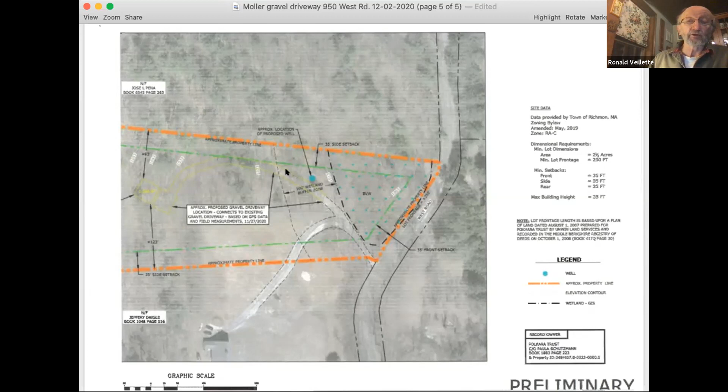How did they get to the new foundation if the driveway's not there? Well, I think they may have intended this to be the driveway. I don't know. It's been cleared, a lot of large trap rock put down. Obviously had to bring in a drilling rig. They put a trench in, they got the utilities sticking up out of the ground, probably came from the road somewhere.

Can you point to where you said the house was again? It's up here on the slope. It looks like it might be outside the foundation there, they must have, how did they get up there? Oh, they've cleared. This is all cleared. Okay, but we don't know if that's their intended driveway. It is, there you go. That's one question. Like Adam said, they could have been coming in this way. It probably would have been easier, actually.

Lovely. So we got this question, so we're gonna have to contact this guy. Driveway to be common. Number two, is this thing permitted? Start with, because there's something there. And I don't understand why they even came this way. This must have been one lot once upon a time, and they could have come in this way if this was always two lots. Yeah, weird. So we need a better definition.

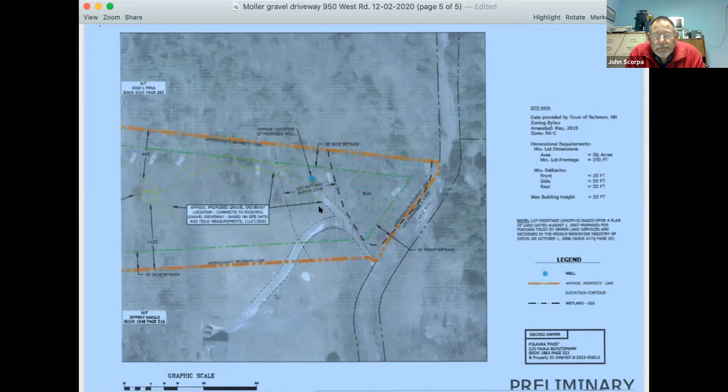Motion for continuation. Continue this public meeting to February the 9th. Do we have a second? Second. All in favor? Aye. I'll do a roll call. Ron, aye. Adam, aye, as I heard. Yep, and aye. Right? Aye. Yeah, I'm listening rather than looking at the screen for your raised hands. Pat, aye. Harley, aye. John, aye. Shep, yeah. Okay, it's continued.

Who's crackling? Okay, give me a piece. Get the agenda back out.

Somebody's eating dinner. Okay, 3B, request determination of applicability from Wood Environment and Infrastructure Solutions on behalf of CSX Transportation Incorporated. The subject property is the entire railway right-of-way through Richmond. The applicant is seeking a determination whether the boundaries of the wetland resource areas depicted on 13 plans and/or maps submitted by the applicant are accurately delineated.

Continued from December the 8th. Shep, the ball game again. You all hear that when I read that? 'Cause my audio wasn't working right there. Well, excuse me, I have a mouthful. No, I mean, okay, my audio. Okay, go ahead, okay.

We have three peer reviewers who will be willing to bid to participate, to be the experts who advise us on this matter.